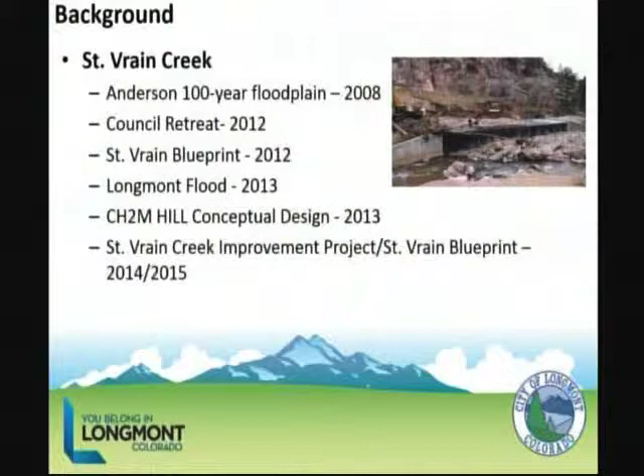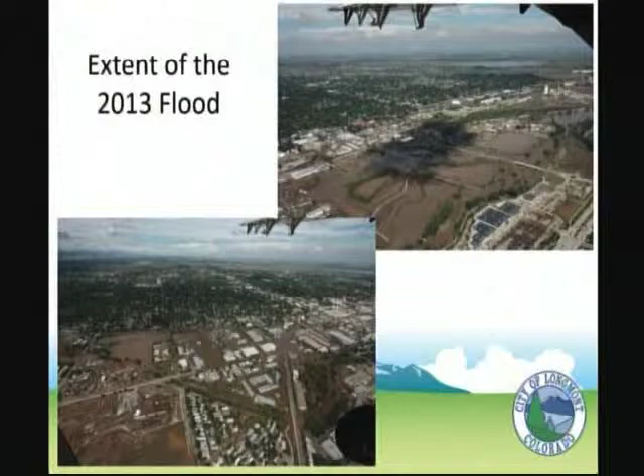The extent of the flood, as I mentioned, if you didn't see it, that was about a half-mile wide floodplain that came through the city. Down here around, here's Izaak Walton Pond, all the way south of the creek down here into that area. Up here, it went from State Highway 119 all the way up to the railroad tracks. A large swath of land that's covered by that and a huge amount of the city that's impacted by that.

So when we look at the St. Vrain Creek Improvement Project, and that's the part of the project that's looking at the river channel itself, we're breaking it into two phases. The city reach, which is from Airport Road here, out to Left-Hand Creek, the confluence with Left-Hand Creek, just past Martin Street. That's the primarily urbanized area of the city.

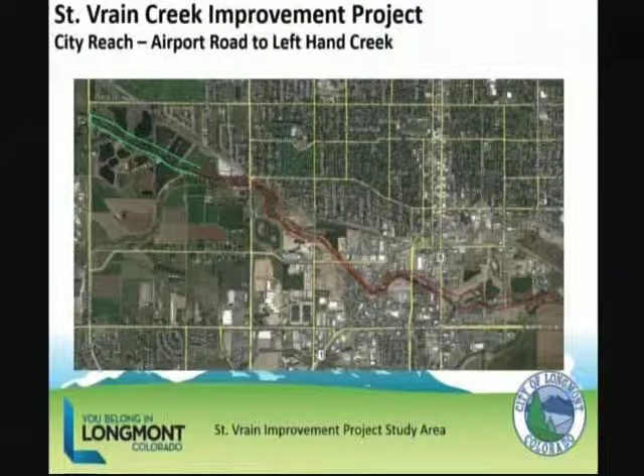Through the planning area, this area out from Lykins Gulch out to Airport Road is somewhat different than that, but also our planning area does go all the way out here. So we're looking at that area as far as the city reach, moving forward with a preliminary design, and then are going to break that into reaches for final design.

The goals of that, as we look at the city reach: protect the community from 100-year flood flows, restore damage to the greenway that occurred during the flood, maintain or improve the natural habitat with natural channel design, and we're going to talk a lot more about that as we go on.

Be consistent with the concepts of the St. Vrain Blueprint for that redevelopment of property adjacent to it. Fiscally responsible, very complex project, a lot of money's involved, and we have to be fiscally responsible to that. And in addition, honor existing planning efforts.

There are a lot of existing efforts, we're not looking at this for the first time. There are a lot of planning efforts that we'll talk about that have already been done and include thousands of hours of staff time and many thousands of hours of community involvement and input.

The other reach is the Sandstone Reach, the city's open space from County Line Road out here to the confluence with Boulder Creek just south of 119. Very different stretch. This was our open space out here. The river channel was originally up through here, and the river channel is now about a quarter mile south of that.

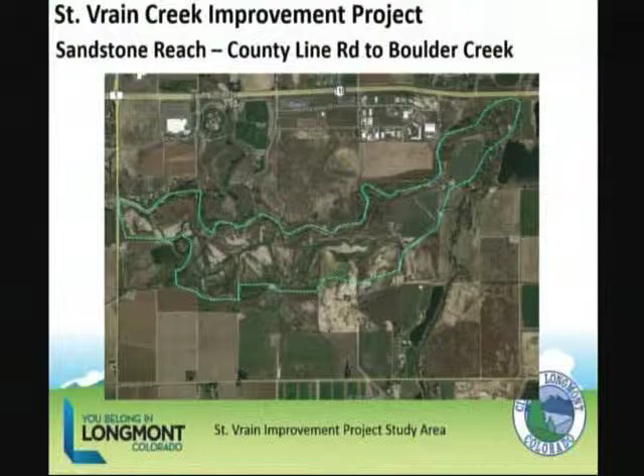Mother Nature moved the river quite a ways. Different goals on this reach. It's a different beast. Here, we're primarily looking at stabilizing the creek. It's still moving around. How do we stabilize the creek to give it a chance to start to regrow?

Maintain or improve natural habitat. Once again, natural channel design. We're not really worried about the floodplain out here. It's a large area, not private property next to the river. Still got that wide floodplain, but the concerns aren't the same. Here it is open space.

Once again, repair flood damages to St. Vrain Creek Greenway. We're moving along on that, but there's a large portion of the Greenway from Dry Creek out to Sandstone Ranch where some real major work on the river has to be done before we can get that section put back together and opened.

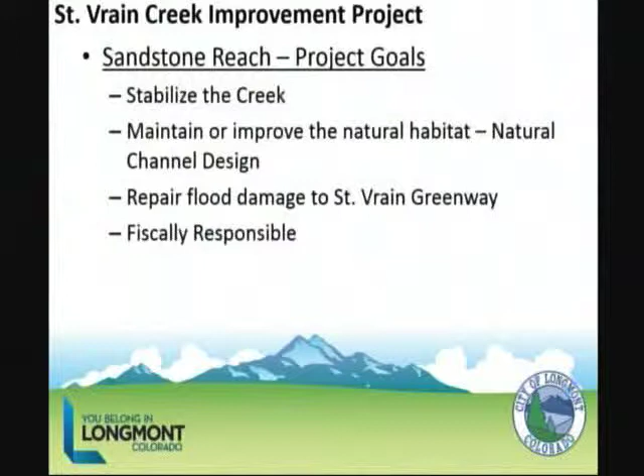Once again, fiscal responsibility—this is a public project with a lot of public dollars going into it, and we'll talk more about that later. So the schedule: right now we're in preliminary design, which started last month in January. We're going through May of 2015 on this. We're on a relatively fast track, partly because a lot of the funding has to do with federal dollars, and we have to move along in certain time frames to meet those.

We're starting right now on NEPA environmental permitting because we have to do an environmental assessment of the entire reach of the St. Vrain as part of this. It'll be required, and it's the right thing to do. Kyle, you're much more familiar with that than I am, so could you briefly talk about what goes into that permitting?

Sure. Good evening, Kyle Hamilton with CH2M Hill. As part of the NEPA environmental permitting process—that's the National Environmental Policy Act through the federal government—because we have FEMA money, federal money being used on this project, that is our federal nexus to need to comply with that permitting process. So that's in addition to any state permitting, other federal permitting, things like that.

So what that process does is look at all of the impacts from the project on the environment and its surroundings—wetlands, wildlife and habitat, other considerations. We will work with the federal lead, who on this project will be FEMA, to identify through the regulatory agencies as well as the public what those key resources are that need to be looked at. When we identify those resources, we'll do an analysis to look at the impacts, look at different alternatives, select a preferred alternative, and that's what will go through the permitting process.

And I know we're moving fast. It's a big project and it's a complicated project. We're going to stay at a pretty high level tonight because we're just starting the preliminary design. So that's the level we're at, is a pretty high level on this thing.

Public input on preliminary design alternatives is going to be in the spring as we finish up the preliminary design. Then we're going to start working on the final design of Phase 1 in June through December. Phase 1 will include the entire Sandstone Ranch reach from County Line Road out to Boulder Creek, and in a first phase of the city reach.

And we're still finalizing that. It most likely will be the reach that goes from Left Hand Creek to Main Street, and we'll be finishing up final design on that this year. We'll carry the final design of the City Reach actually from Left Hand Creek up to the BNSF Railroad Bridge, which is upstream from South Pratt Parkway.

But the first phase of construction, which we will get to in 2016, will include the Sandstone Reach, the entire thing, and then that first phase that I was talking about, which will probably be from Left Hand Creek to Main Street on the City Reach. Overall construction completion, to move all the way through the City Reach, we're anticipating somewhere in the neighborhood of 5 to 7 years. And we'll talk a little bit more about that later as it relates to funding.

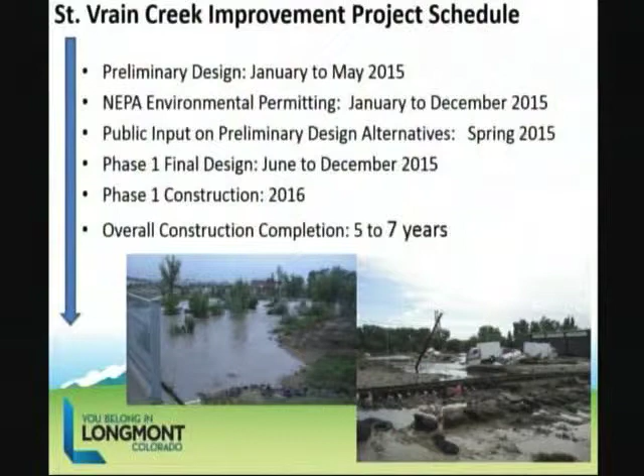I mentioned existing master plans and related city codes. There are a lot of those, and we're going through those right now, and it's our intention to honor those. We don't need to start over. We've looked at this in great detail.

St. Vrain Greenway Master Plan, Wildlife Management Plan, Rogers Grove Management Plan, Open Space Master Plan, Parks and Rec and Trails Master Plan, the Longmont Area Comprehensive Plan, Southeast Urban Renewal Plan, First and Main Transit and Revitalization Plan, Dickens Farm Park Master Plan, and there are several codes that relate to this.

Some of them relate to riparian setback, residential protection setback. These studies have occurred over really probably the last couple of decades, and they all happened pretty much individually. So we're going through those now, looking to see if there are any conflicts between them - does one say one thing and another say something else? Overall, we're seeing more similarities than differences, but there are going to be a few differences, and we'll have to work through those and get final direction from council on how to address them.

Natural channel design - I talked about that quite a bit, and I hear from a lot of people concerns that they think we're going to come in and really change things on that. And the St. Vrain Creek is an important asset to the community.

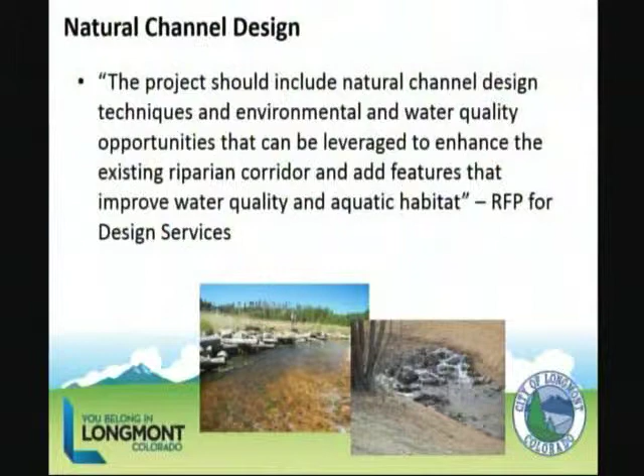This is from the request for proposals that we sent out to engineers, saying this is what we're looking for somebody to do: the project should include natural channel design techniques and environmental and water quality opportunities that can be leveraged to enhance the existing riparian corridor and add features that improve water quality and aquatic habitat. So that was what we tasked CH2M Hill with.

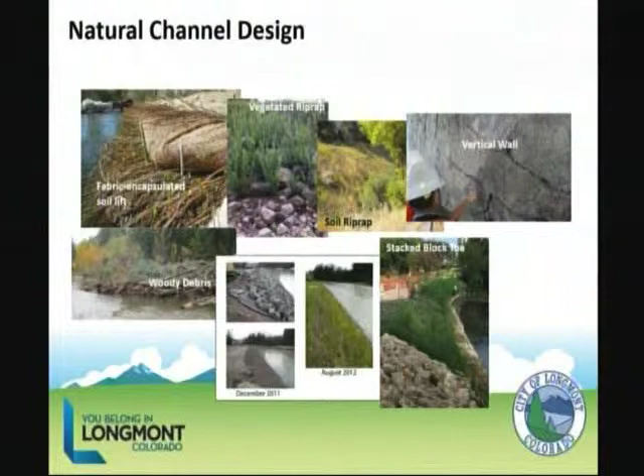We've been working with them over the last several weeks, and I see Dan Wolford and Steve Ransweiler up there - they've been in a lot of these meetings. City staff from natural resources, engineering, Brad, and our consultants have been sitting down looking at what natural channel design means, what techniques we can use, and how we can best do it. It's not really new to Longmont.

When you look at the last couple of projects we've done, you see very much that. If you go over and look at the mall and the Dry Creek concrete channel that goes through there, that was from '85. And that's not the way we do things anymore.

Steve's laughing back there. This is Left Hand Creek that was done at the time we extended Ken Pratt Boulevard. That was done to take the area where Harvest Junction is located, where State Highway 119 is located, and the museum and rec center were located, out of the floodplain.

Left Hand Creek had over the years really been turned into an irrigation ditch. It had been narrowed down to optimize the amount of farming room adjacent to it. The city went in as part of that project and widened it out, and it's become a great greenway that provided not only flood protection and took large areas of land out of the floodplain, but also created a great greenway and trail system that's an amenity to the city. And that's the way we have done things.

Lykins Gulch is another one we've done, from Airport Road to Golden Ponds just a few years ago. Another flood protection project that resulted in being able to create a nice open space area, new wildlife areas, and a great trail system that works. And if you look at this picture, that is Lykins Gulch.

It worked. When the flood came down, that intercepted flows and channelized them back to the St. Vrain, which would have otherwise continued and hit a lot more of Longmont than was hit with that channel being there. So we're going to continue on in that way, and this project is going to be done in a way - it's very challenging. Different areas have different opportunities and constraints. There's a lot of it through built-out town already, but this is the technique we're looking at to use to guide our design efforts.

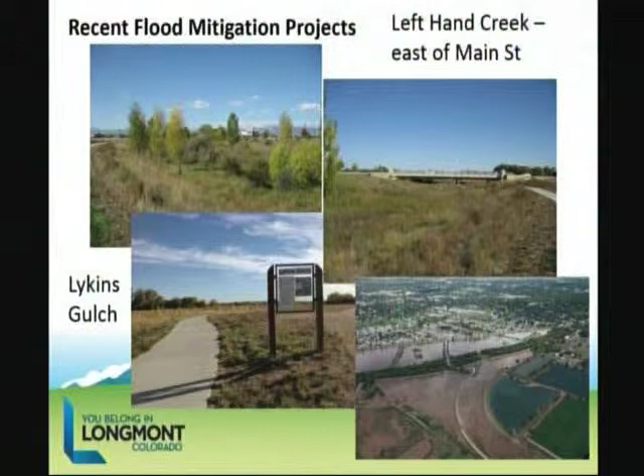St. Vrain Creek capacity and storm flows - let's talk a little bit about some numbers, the part that the engineers like. Pre-flood, we had a capacity in St. Vrain Creek through Longmont of about 5,000 cubic feet per second. After the flood, that was down to about 3,500 cubic feet per second because of all the gravel and debris deposited in the creek. We've done some cleaning, as much as we could afford to do now, and we're probably up somewhere in the 4,000 to 4,500 CFS range right now. The existing FEMA regulatory flow for the 100-year storm that FEMA designs for is 10,000 cubic feet per second.

Right now, a new study is being done by the state and the feds. FEMA's involved in that, and CDOT actually led the way on it, because CDOT is worried—Colorado Department of Transportation is rebuilding a lot of these highways and they're tired of rebuilding them. Think of the number of times they've rebuilt Big Thompson Canyon, how much money have we spent on that. They're trying to get a better idea of what the 100-year storm flows are.

They're looking at Left Hand Creek, Boulder Creek, St. Vrain Creek, Big Thompson, Little Thompson, and Coal Creek. So they're looking at a lot of those.

They're looking at St. Vrain Creek, and the study isn't finished yet, but the new numbers they're generating say that at Main Street, the 100-year storm is closer to 15,500 CFS, 50% higher than that 10,000 CFS number. So that floodplain we had, which used to be this wide, is now going to become this wide.

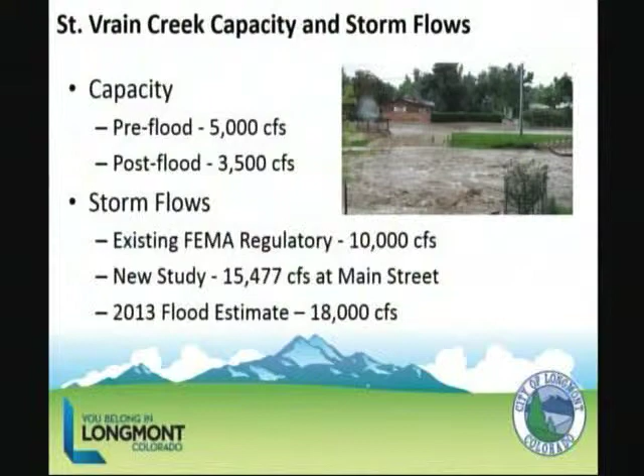2013 flood estimates at Main Street were about 18,000 CFS at its max. When that happened, we talked a lot about whether it was the 100-year flood or the 500-year flood. With these new numbers, it's turning out to be a lot closer to that 100-year flood than the 500-year flood. So that reflects what we have to design around.

Separate bridge projects, kind of separate but once again tied in, are several bridge projects. We can widen out the channel, but if we don't widen out the bridges, we're not going to be able to do that. First is Main Street—that design is underway. Sunset Street was destroyed during the flood.

We're working on that design. That's a regular question we get asked. The design is underway. We'll look at the schedule in a minute, but it's scheduled to start this summer.

South Pratt Parkway will follow the Main Street project. Other bridges with limited flood capacity as we look through Longmont: Airport Road, Hover Street, Boston Avenue, and the BNSF Railroad Bridge. All of those are limiting factors.

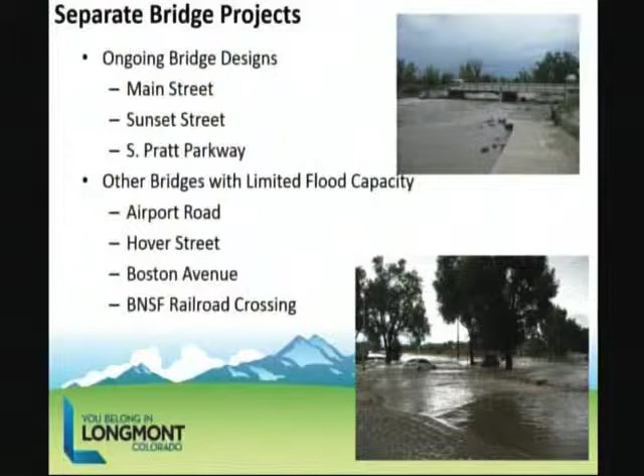The Main Street Bridge is under design right now. We're going to be completing that design in May. Construction will start later this summer, and we anticipate it will be completed next spring or very early summer. The South Pratt Parkway Bridge is also under design.

We'll be completing the design on that next year. After the Main Street Bridge, we're not going to close both at the same time. After the Main Street Bridge is opened again, we'll be working on the South Pratt Parkway Bridge in 2016 and 2017. We're working with Boulder County and the Federal Highway Administration, who's funding the Sunset Street Bridge because of flood damage.

That design is underway. Design is scheduled to be completed in about June, and construction will start later this summer or early fall, carrying on through the spring of next year.

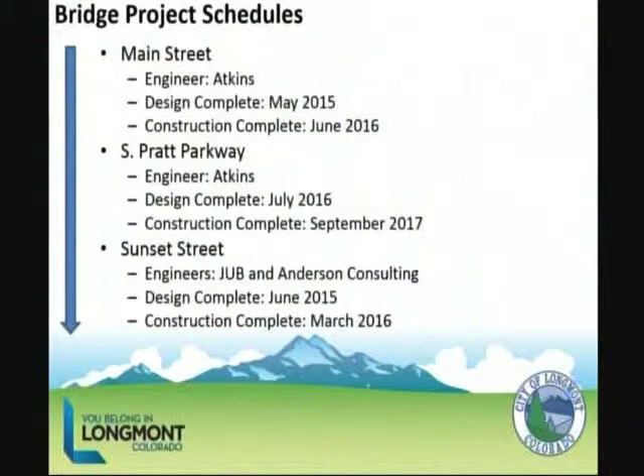And that's the majority, kind of a very high-level description of the St. Vrain Creek Improvement Project. If there are any questions, I'll take them quick. Otherwise, Brad will go on and talk more about the St. Vrain Blueprint.

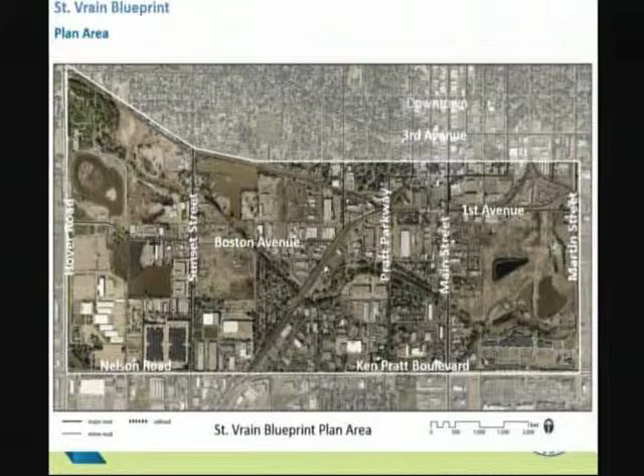The St. Vrain Blueprint planning area has primarily been focused, as a subset of what Nick was talking about, from Hover Road to Martin Street. That's the urbanized area of the city, and the intent there is to look at what would be the appropriate improvements, appropriate restoration techniques within the modified channel that are most attractive to Longmont residents and their preferences, and in addition, look at the relationship to the adjacent properties.

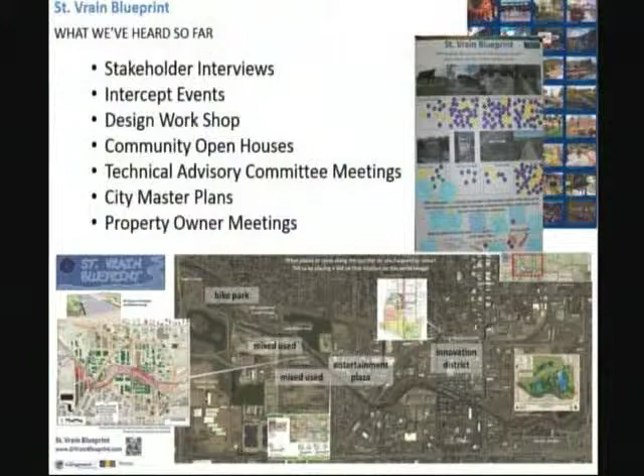There have been outreach efforts involving stakeholder interviews, intercept events at Rhythm on the River and the Festival on Main, a design workshop earlier this year, and several community open houses. There's a technical advisory committee representing various disciplines within the city to provide oversight for the St. Vrain Blueprint planning work. As Nick indicated, we've referenced previous master plans done by the city, the time contributed by citizens, and considerable public input. We've also had meetings with property owners up and down the corridor, since they'll be significantly impacted by the work being done in the stream channel.

So far, the highlights of the plan show an enhanced greenway corridor. If you visualize the St. Vrain Creek, you'll recall places like near Left Hand Brewing where the channel is about 40 yards wide, or 120 feet. The new channel will probably need to be around 300 feet wide—that's a lot of space to carry a lot of water, as you saw in the numbers.

Within that additional space, there are opportunities to create more natural channel conditions, appropriate water quality systems, riparian habitat, and recreation opportunities through the trail system. There will be nodes of recreation within the trail system—I'll show a few slides of what those look like. We're also looking to expand trail system connections wherever possible to improve access to the St. Vrain Greenway.

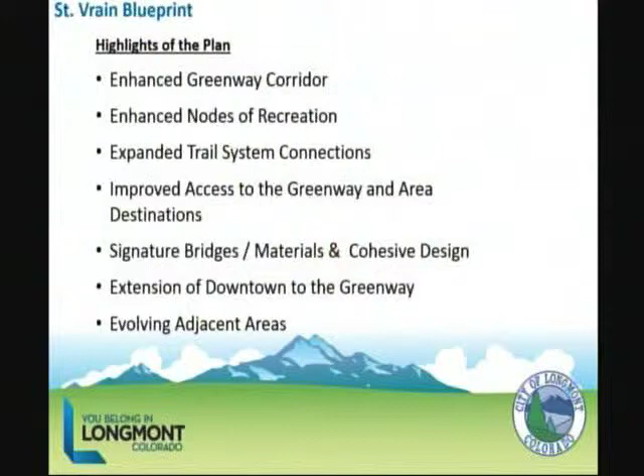We'll show some slides of the design standards for the bridges and access to downtown. Important feedback from citizens in our outreach and ongoing public comment emphasizes respecting the multiple functions of the greenway. Flood conveyance is the high priority, along with recreation, habitat preservation, and wildlife management, to name a few—balancing and creating a dynamic relationship between the natural and urban space.

This is really about upgrading the quality of the greenway compared to its pre-flood condition. We'd like to improve the visibility of the creek and its role within the region, leverage the greenway as a community asset, and strengthen connections between the greenway, neighborhoods, and other community centers.

Here are some focus areas represented in the St. Vrain Blueprint. The first box on the left is the Rogers Grove area, the second is Izaak Walton, the third is the sundial area at Pratt Parkway and the river and Main Street, and lastly downstream to Dickens Farm Park.

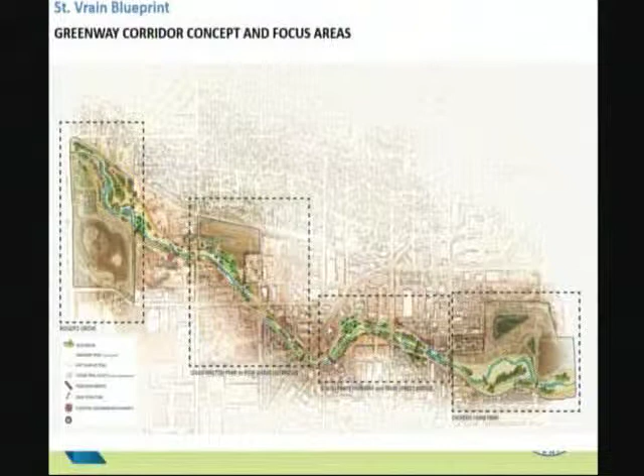Those are some of the previous planning efforts that have been conducted, and they're being rolled up into the St. Vrain Blueprint as well as the St. Vrain Creek Improvement Plan.

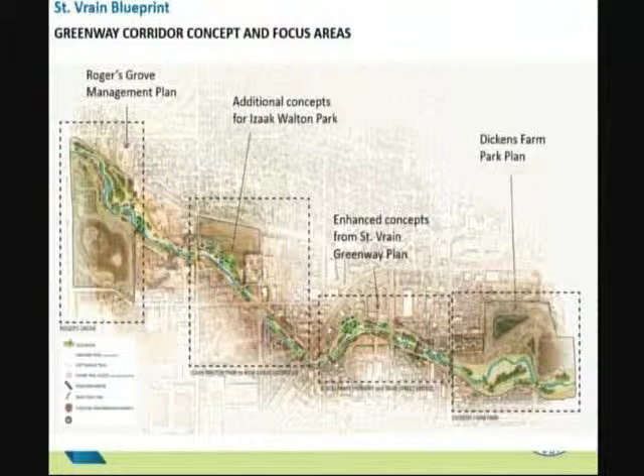Talking about extending access to the greenway to neighborhoods and existing trail systems and other important locations—there's a connectivity study showing how we can improve access to the greenway and to certain destinations, like the Boulder County Fairgrounds and Farmers Market, and potentially a link south to the Twin Peaks Village redevelopment area. Another circle shows a potential access point coming down Price Road, crossing the greenway at an existing bridge, and continuing down to give mall access as well.

Here are some regional pictures showing what the St. Vrain Greenway looks like in relation to the Longmont Boulder, or Lobo, Trail, and another showing the St. Vrain Greenway incorporated within the Parks and Recreation Master Plan.

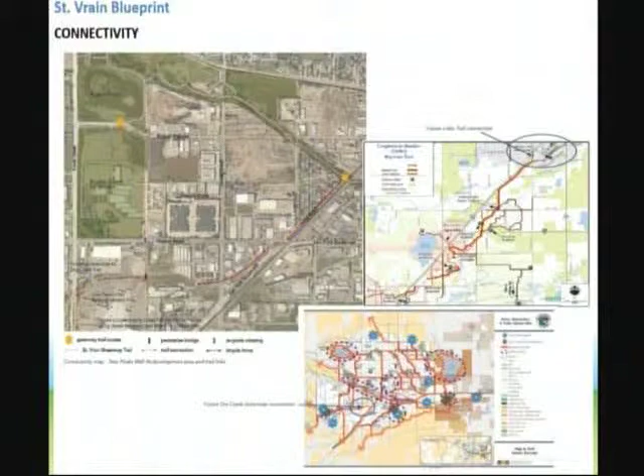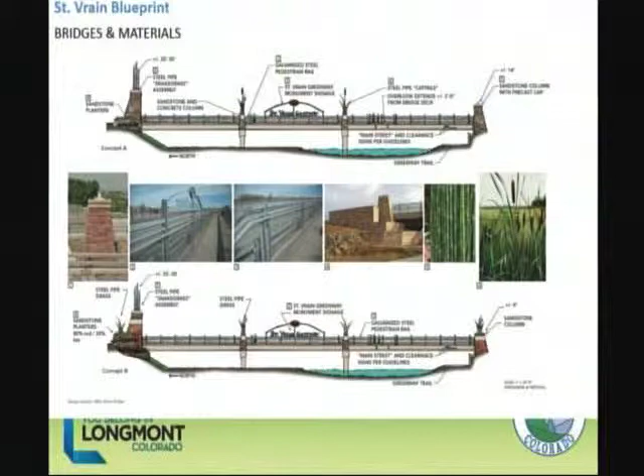The St. Vrain Blueprint is intended to take design considerations and inform the St. Vrain Creek Improvement Project, with the intent of creating architectural upgrades to the bridges and other infrastructure found in the greenway. This is an illustration of the design work done so far on the Main Street Bridge—we're still working on some elements of the north abutment and columns, but we hope it will represent an attractive community asset in terms of public infrastructure investment.

Here's another shot looking north across the river. If you were in the Burlington Village Shopping Center, you'd be looking across—this is an illustration of what the bridge might look like from the existing trail location on the south side of the river.

The bridge design is intended to be replicated throughout the capital project. Here's some illustration done for the Pratt Parkway Bridge, where the columns are repeated and the same kind of railing is going to be used. This particular bridge features an overlook. Those of you familiar with the Pratt Parkway Bridge know that it can be a challenging pedestrian experience to cross that bridge.

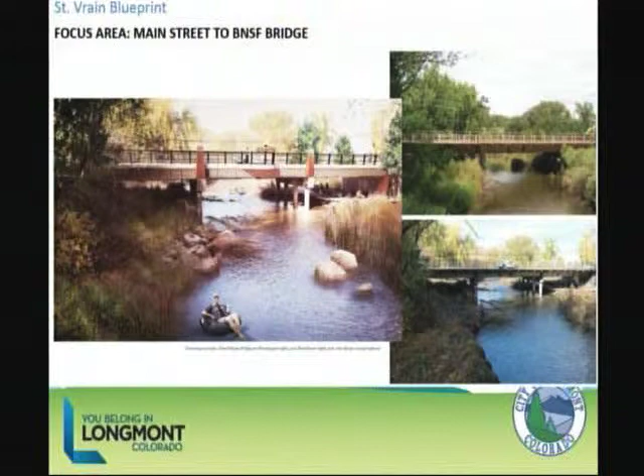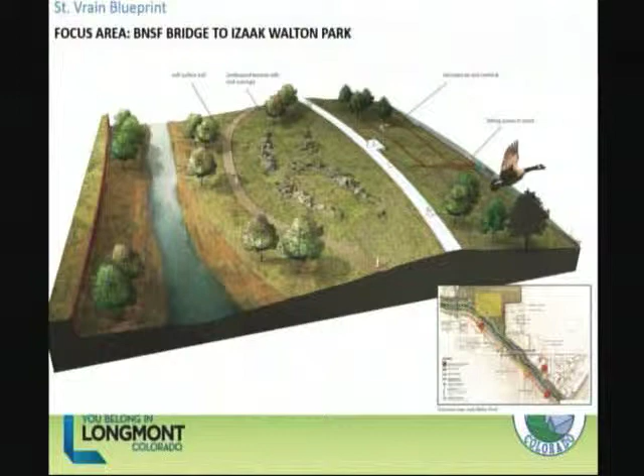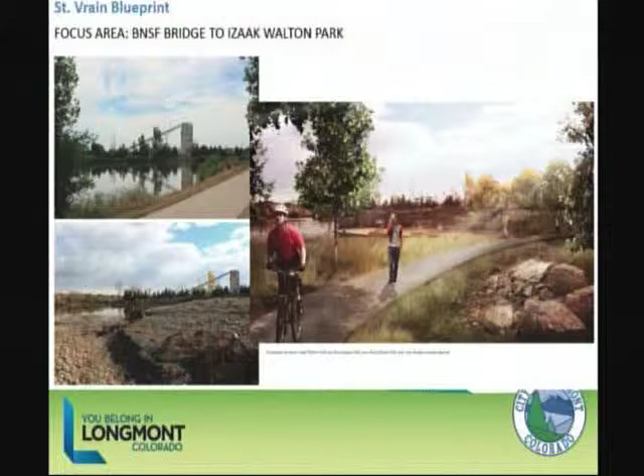And here's some more illustrations. This was the before, this was the after flood, and this is an illustration of what it might look like after that's been restored and completed. Another location, just upstream of the sundial at Pratt Parkway, shows what a terracing effect on the vertical walls might look like.

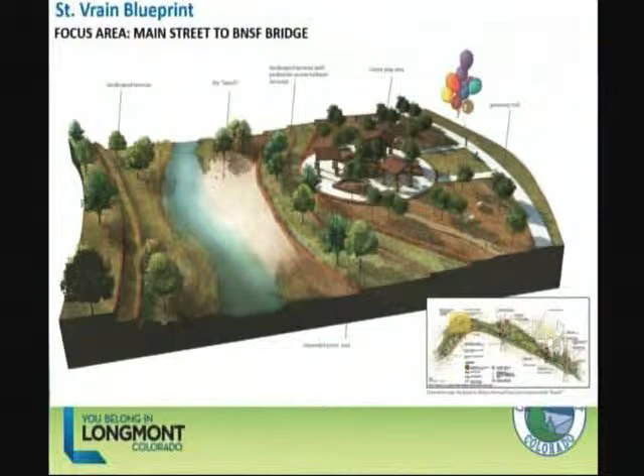One of the key recommendations of the St. Vrain Blueprint is to create an extension of the First and Main redevelopment area. We're hoping that the development of a plaza, just upstream of the Main Street Bridge on the north bank of the St. Vrain — and I was pointing out to Melissa that for those of you who look at this carefully, you would assume the river flows this way. It probably really flows this way, so that might be something else we'll fix. But there are opportunities for gathering places at this location, and it creates a nice anchor to the south end of downtown.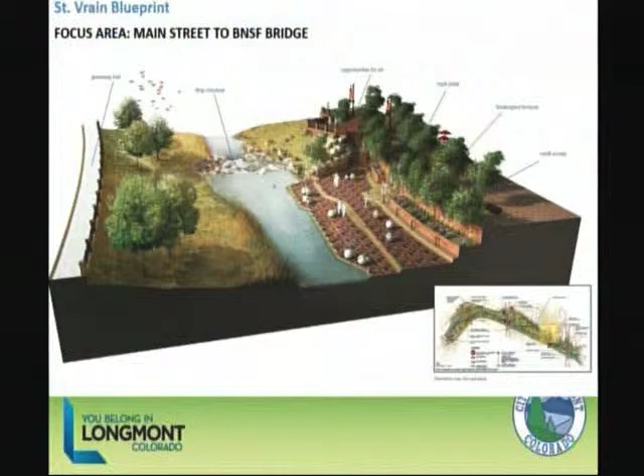Some of the feedback we've had with respect to the redevelopment areas is that they should be allowed to evolve over time, and that many of the uses and businesses in that area should be permitted to continue to exist.

A new neighborhood would be adaptive with respect to some of the existing buildings that could be reused. In those locations where there is undeveloped or underdeveloped land, that could be considered for utilization.

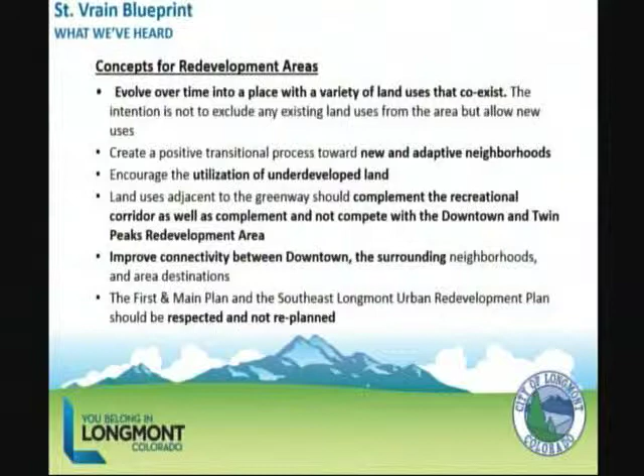The fourth bullet talks about recreational corridor, making sure that as this area develops, it doesn't create direct competition with downtown and the Twin Peaks redevelopment area. Connectivity to downtown and surrounding neighborhoods, and finally, respect the First and Main Plan and the Southeast Urban Renewal Area.

Here's a map that shows what we think will be the development pattern in the St. Vrain Creek area. Again, this is bounded by Martin Street and Hover. The particular area being looked at right here is the Sunset/Boston neighborhood, an area in which we anticipate adaptive reuse and some economic reinvestment.

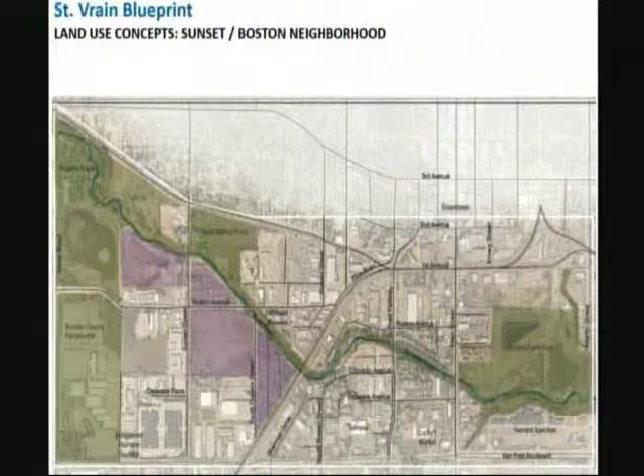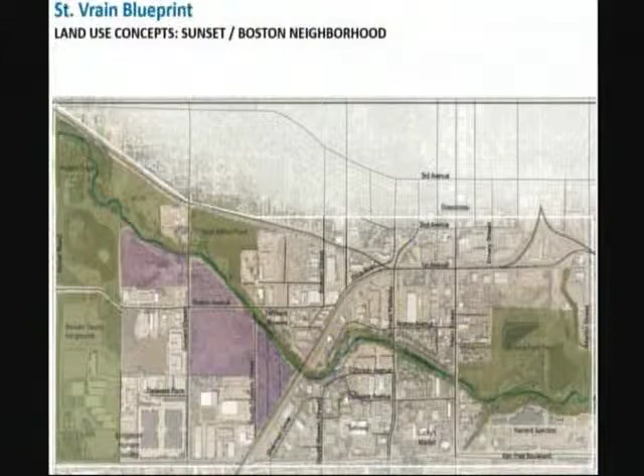Another location is on the south side of the creek. This is the former aggregate property. These are some properties that have some outside storage on them; Colorado Materials is one of those. And then the St. Vrain Mobile Home Park is another location we've been talking to the property owners about this project and explaining how we're aiming to take those homes out of a flood risk area.

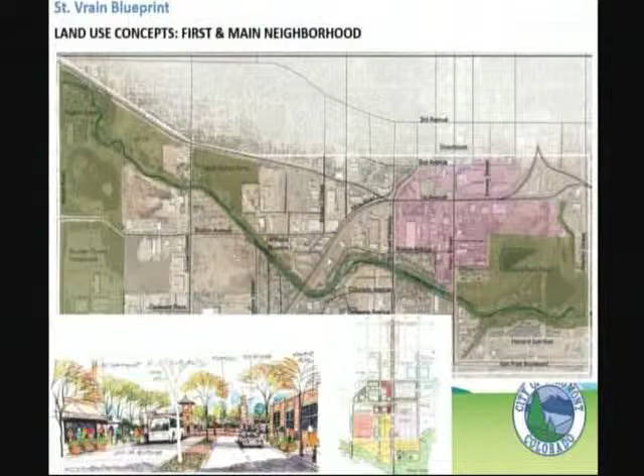Another land use area is east of South Pratt Parkway in the First and Main transit area plan. Here's some pictures from the First and Main area—that'll be the location when or if the train comes to Longmont.

Here's some 3D images of what could potentially occur with respect to redevelopment along the river corridor. We're going to be modifying this slide based on feedback we've gotten so far from interested parties. One thing is we'll probably reflect a wider channel and show more native habitat in the area. The other feedback is that the height and massing proposed for some of these buildings is overwhelming to the greenway experience, and that should be reduced. So we'll be formulating recommendations and modifying these graphics to show a reduction in the height and mass of these buildings.

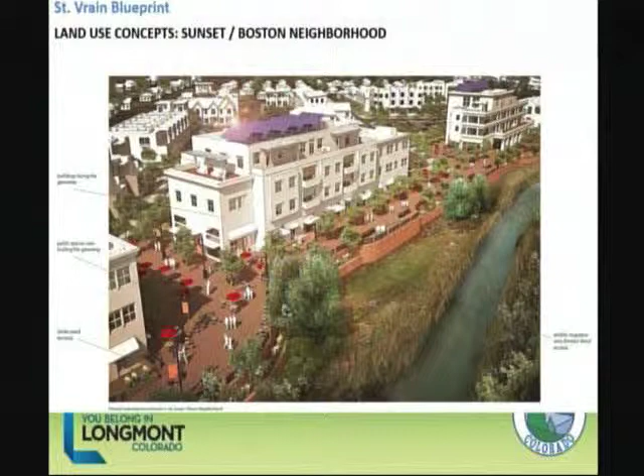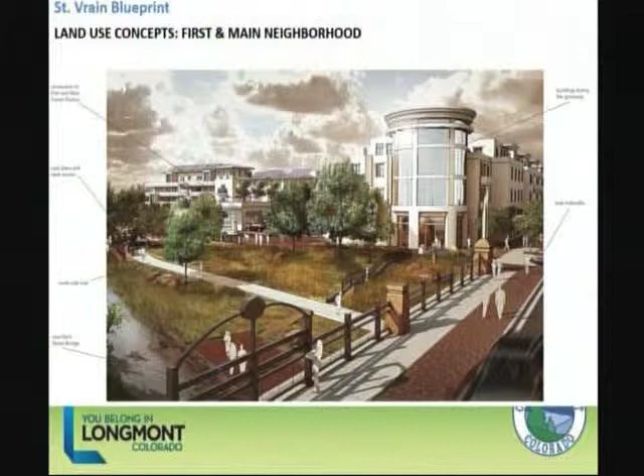Here's a shot of the northwest corner of the Main Street Bridge and the St. Vrain Greenway, and an artist's illustration of what could be an important keystone building at the south end of the First and Main redevelopment area. Mixed use, commercial, retail, coffee shops, restaurants are the kind of things we think are likely economic development opportunities in this area.

Here's a bigger image, a bird's eye view, of what the area would look like. To orient you, this is Boston Avenue, and this would be Left Hand Brewing. We've had considerable discussions with Left Hand with respect to their plans to expand their facility. They're hoping to create a plaza area on the southeast side of their property, and they have a number of events on that property as it is now.

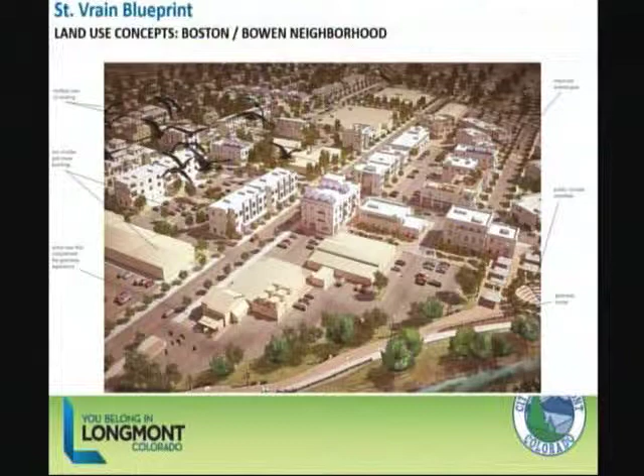So here's what we've done so far in the St. Vrain Blueprint. In 2013 and up through March 2014, it was data collection and mapping existing conditions, talking to stakeholders, and trying to gather public input. In March through August, there was a design workshop, alternative scenarios were developed, a community open house, an economic analysis, and then refinement of preferred alternatives.

Now, with the phase we're in now, we're refining the plan. There will be another iteration, another draft of the St. Vrain Blueprint that hopefully near the end of this month we'll be ready to roll out. We'll continue community outreach—it's been an exciting process to coordinate with the St. Vrain Creek Improvement Project on the engineering side—and then we hope in early summer to be at the City Council and have the St. Vrain Blueprint considered for approval.

Thank you, Brad. So I'm going to talk briefly about the financial side of things. Estimated needs for initial project components—that's the St. Vrain Improvement Project, the channel widening, the bridges, that sort of thing, both at Sandstone and the City Reach—estimated about $100 million. A lot of money, obviously.

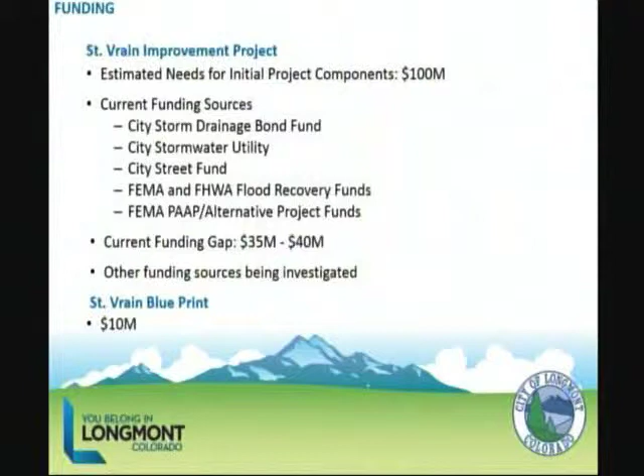Next steps, like I said, we brought you all together this evening to provide you some information. We've taken roughly an hour of your time. We're going to open it up when we get finished here for community or for questions from the board.

We'll be taking items to council on March 24th. The project and NEPA environmental permitting open house will be done in conjunction with that council meeting, between 5 and 7 p.m. up in the mall area. There'll be an open house, and there will be a public hearing on that at the council meeting on March 24th.

Public input on preliminary design alternatives, when we get that done, in spring and summer is when we will move forward with that. And with that, we'll open it up first to questions from the board, if there are any.

Any of the board? Yes, ma'am. Hang on, sorry, we're recording this, so we're going to ask everybody to bear with us. Now it's on? Now it's on. Can you hear me now? When you get the microphone, we are video recording this, so they've asked if you would stand up and ask your question. Hello, can you hear me now?

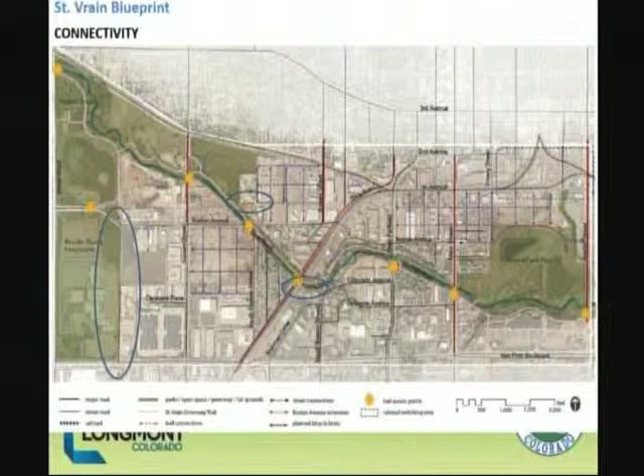The other connection link we're trying to make is across the railroad tracks to connect what's Boston Court, thank you Brad, across the railroad tracks to Boston Avenue. Whether that happens in concurrence with this is an ongoing effort we're going to be looking at, and it probably will come up during those discussions because we need to tie those two together in some regards.